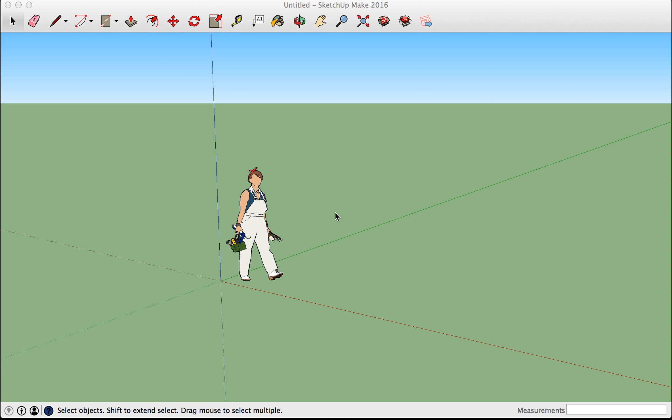Alright, so making a mortise and tenon in SketchUp is pretty easy. First thing we'll do is get rid of her, and let's change our view a little bit and zoom out.

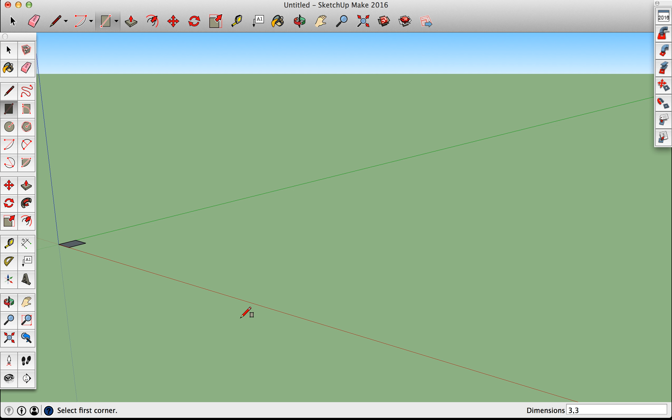Alright, so we'll make our leg blank. Start in the corner here, and we'll go 3 by 3. Let's zoom in on it because that's really small.

Now we'll use our push-pull tool, which is this here, and let's make it 10 inches just for demonstration purposes. We'll zoom in a little bit more so we can see it, and we're going to put the mortise on this face here.

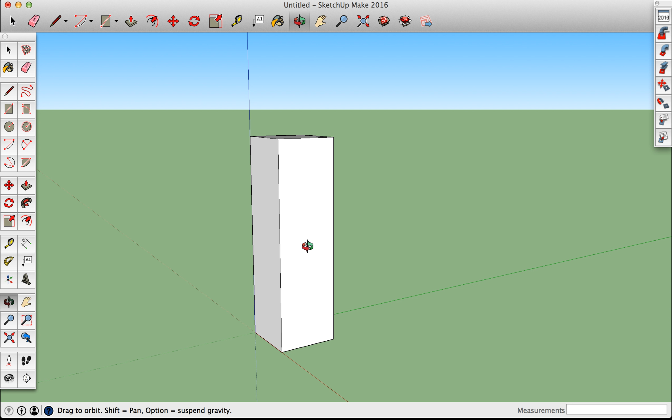So we'll grab our tape measure, say we want our mortise to be 4 inches from the bottom. So we go up 4 inches, that'll give us our line. We want it to go in 1 inch. Come on, 1 inch. There we go.

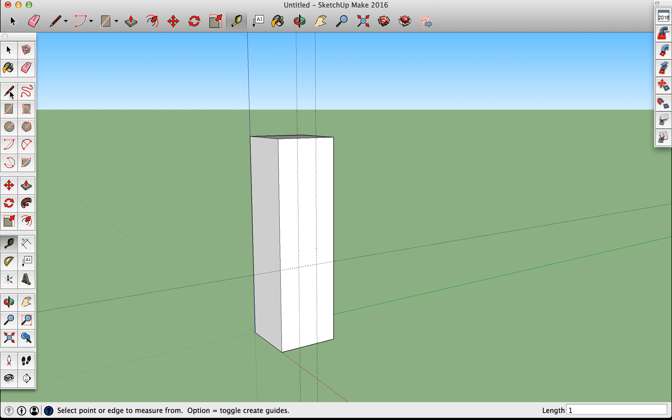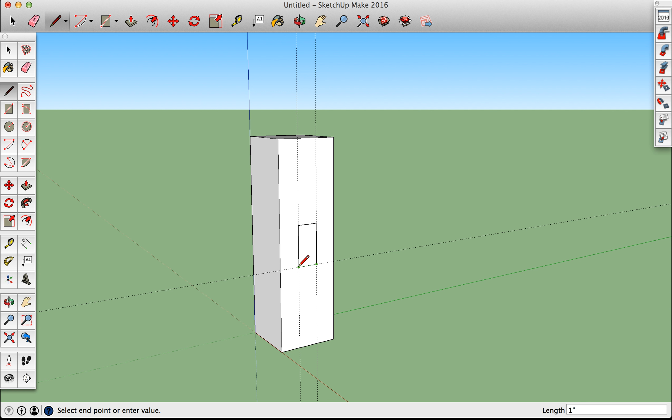We'll grab our line tool, go to the intersection of the two tape measure lines, and we want our mortise to be 2 inches. Cut across - you'll see that if it's green, it means it's on the green axis, horizontal or perpendicular to the edges. And we'll go down to the intersection and back to the end point.

So now we've got our location for the mortise. What we could do is grab our push-pull tool, select this location, start going inwards, and we want it to be 1.5 inches deep. So we'll go 1.5. And now if we look, there's our mortise. Super easy.

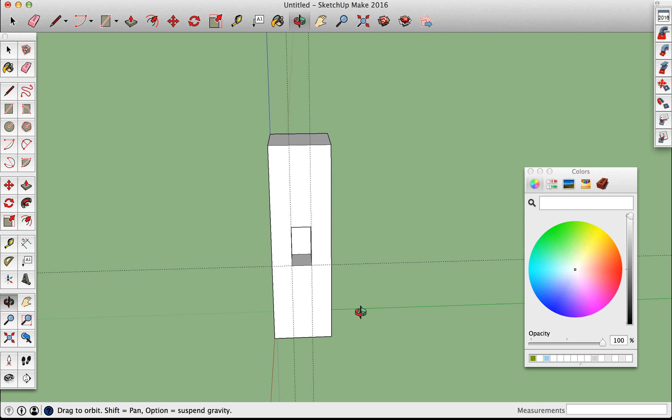And for ease of not having to draw another piece, let's put a tenon on the end of this thing here. So following the same rules, we're going to make the tenon in the center.

So we get our measuring tape, go in 1 inch, go in 1 inch, and say we want it to be - our mortise is 2 inches wide, so this piece is 3 inches - so we'll go in 1/2 inch.

And from here, we'll go 2 inches. Okay, or don't draw it. So now if we measure from here to here, we should get 2 inches, so there we go.

So what we could do is, there's a couple ways to go about it. One, we can extrude the tenon. No - oops, sorry, I forgot to put my lines in.

We can grab our line tool, go intersection to intersection to intersection to intersection to intersection. Now we've got our markings for the tenon.

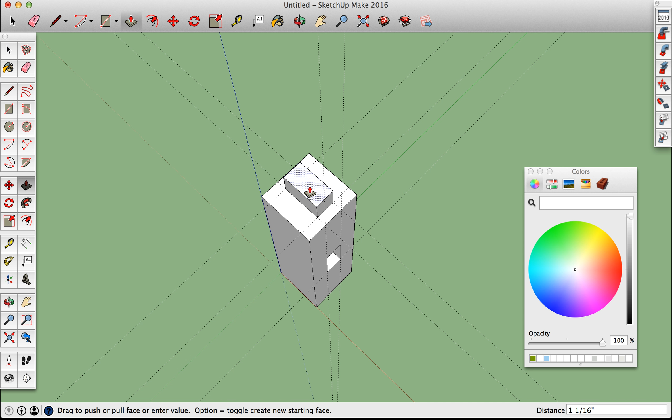And there we go, make our tenon - same way we made the mortise, except in reverse order. So we want to pull that out, 1.5. There we go. That would be a matching tenon for this mortise we just created.

The other way to go about it is to draw everything except for the tenon and then bring the piece down. However, it depends on how you're dimensioning and exactly how you're going to do it, but there you go. That's how you make a mortise and a tenon.